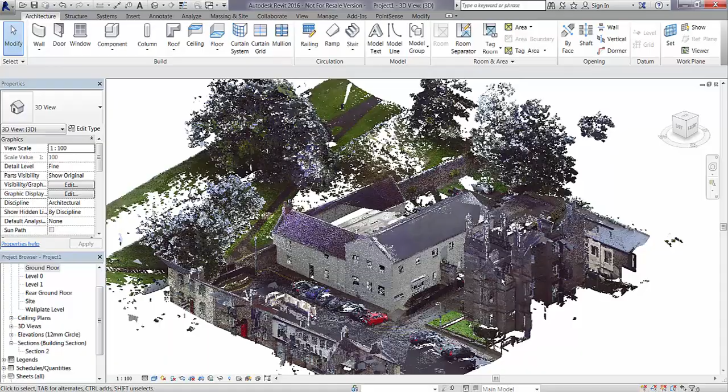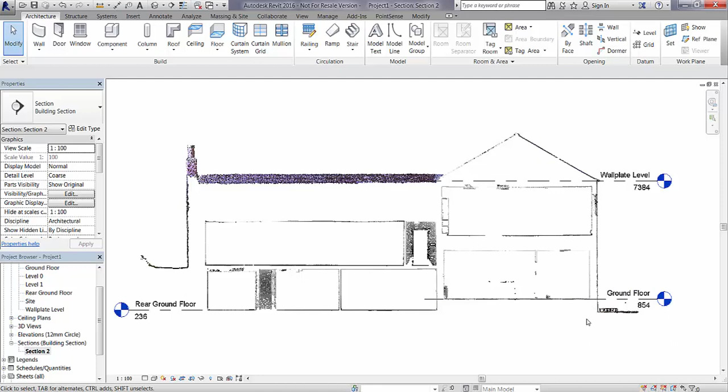So I'm just going to open up a demonstration project inside Revit now. As you can see, we have a colorized point cloud, and it is a 1960s office building of traditional construction. If we just go to a predefined section that I've already made, you can see the building's on split levels, and I've already taken the liberty of creating some actual levels for us to work from.

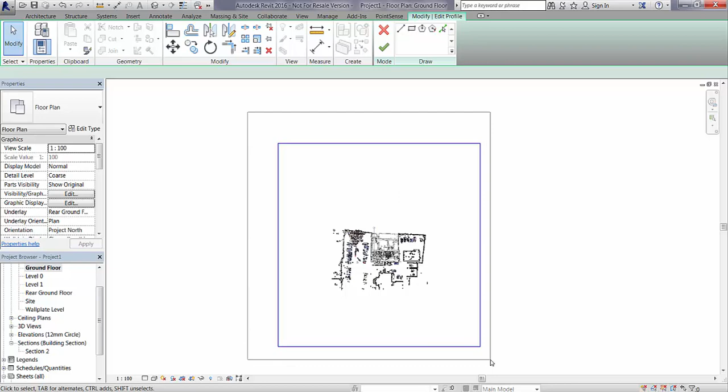If we just go to the ground floor and zoom in, one very important thing that we need to remember when using the Prepare Point Cloud function is that we need to set the clipping range of the view. We can do this by enabling the clipping box, selecting it and clicking Edit Crop. We are then going to delete that crop region area and create a new one around the outside of the building. This is very important because the Prepare Point Cloud function will search the entire extent of the clipping region.

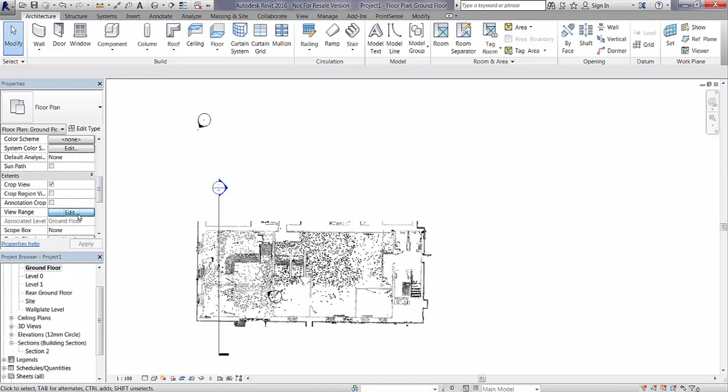So now we've changed that, the second thing we're going to do is just to hide that off, and then we're going to go to our view range and edit the view range. We're just going to lift the base of this view range up very slightly, about 600mm, just so we've got rid of some of the floor area and we've got a nice clean view that we can now run the Prepare Point Cloud tool on.

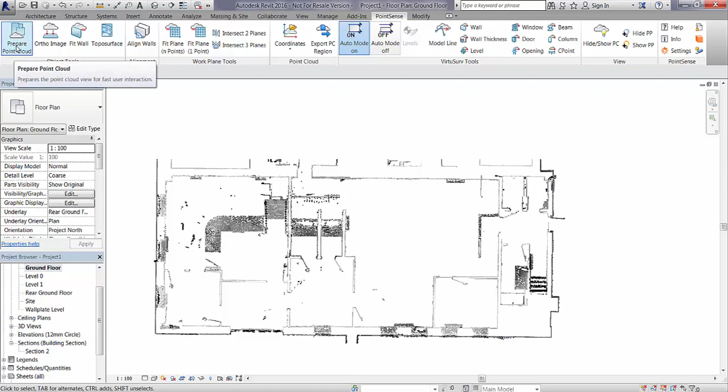So if I now go to my PointSense tab and I click on the Prepare Point Cloud tool, we are now going to be presented with a new dialog box. This dialog box is going to tell us our lower level offset, which is 600mm, and our upper level offset, as well as the clip box size. It's going to give us the option to prepare the point cloud and insert it hidden into this view, insert into this view and hide the point cloud, or to create a copy of this view and locate it there. So I'm just going to press start now.

Now you can see the speed that this is going. This is not really realistic. This will take about 4 or 5 minutes depending on the size of the point cloud you have and the crop region. This actual image that you're watching now took about 5 minutes to generate. However, obviously I've speeded this up during the video so that we could see the entire process. Essentially what's going on now is an orthographic image has been generated, which we can then insert into the project.

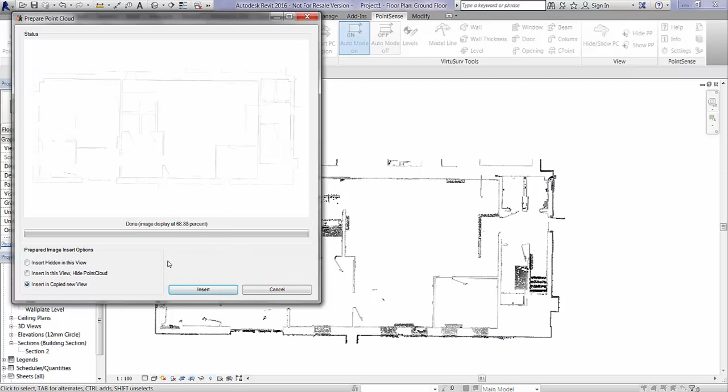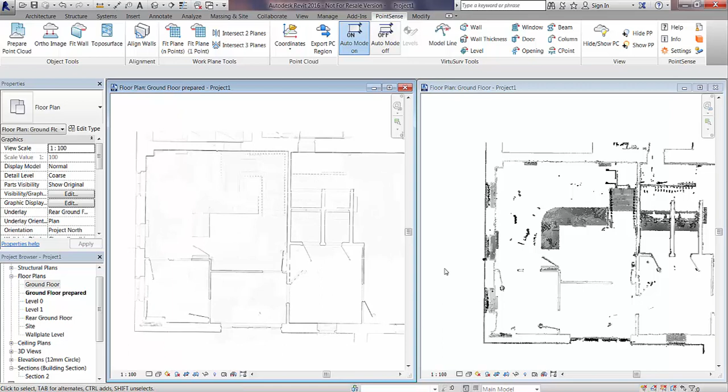So I'm just going to go now and open up my ground floor prepared view, which has been added into my project browser there, and as you can see, the Prepare Point Cloud function has basically created an X-ray type image to give us a much better definition of the main surfaces which we can see on the plan. So if we just open up the original point cloud view and tile these two together and zoom in on a couple of elements, you can see the difference that has been made and how well you can actually now see the edges of the walls, particularly around window openings.

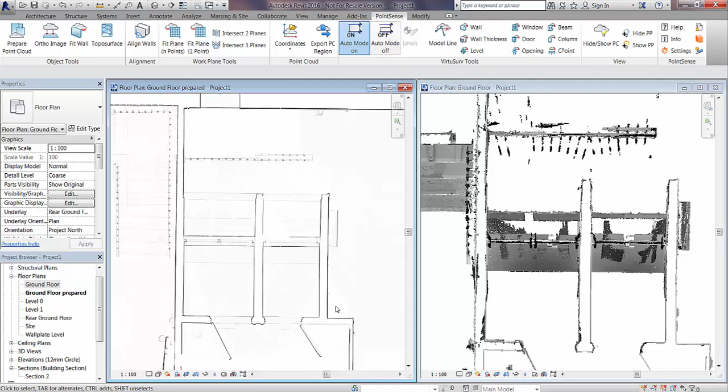We can also see the stairs a lot more clearly now. And if we just zoom in around some of these mullions and things there, we can see door openings and things are a lot clearer.

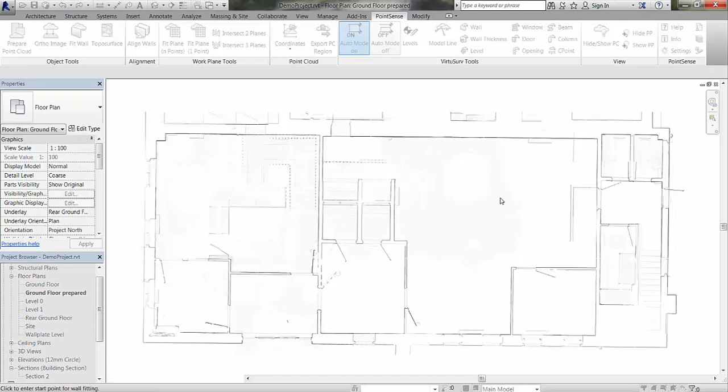So now that we've prepared our point cloud, we are going to use the Fit Wall command. To do this, I go into Object Tools and Fit Wall command. I then need to set my top constraint for my new wall, which I will use wall plate level, and I press Start Fitting. I'm then going to select a point at the start and the end of the wall of a uniform thickness, and I will be presented with the Fit Wall selection screen.

As you can see, the two red lines here have generated a measurement. The measurement of the detected thickness is 400mm, and it is giving us a selection of walls which are loaded in the project and giving us a delta measurement away from the detected thickness. So the closest fit we have is a 440mm wall. We also got this screen which we can use to determine the rounding factor we allow the software to use, and we can cancel and repeat that command.

We can insert the selected type, or we can insert the selected type with an adjustment. If we do this, this will edit the structure layer of the selected wall type with a rounding factor of 5mm and insert that wall type. However, what we are going to do is create a new wall type, and we're going to call this survey wall.

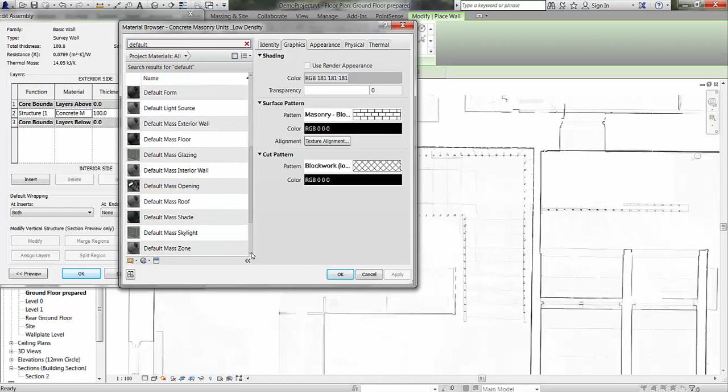And for people like surveyors or other people modelling point clouds, often you will not know the makeup of the actual wall itself. So in this instance, what we're going to do is create a survey wall type with the material set as default wall. So we set that from this list here, click OK, and we're going to leave the thickness at 100mm for now.

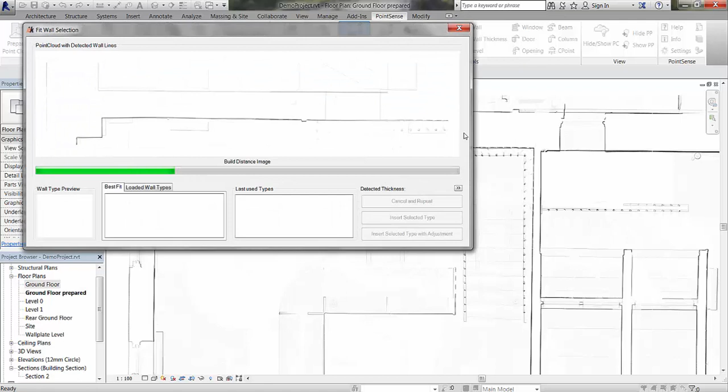Click OK. Now we're going to go back into our PointSense command and use the fit wall command again. So I'll set my level to top constraint to wall plate level again and start the wall fitting. Click the start of the wall and click the end of the wall. The algorithm runs again. Now what we're going to do this time is choose our survey wall, which is set at 100mm thick currently, and we are going to insert the selected type with an adjustment.

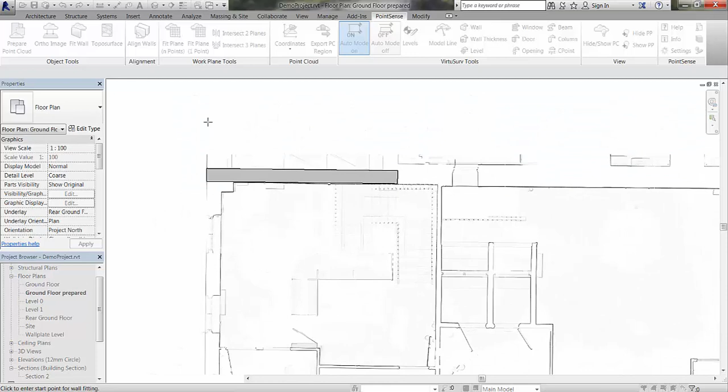What this will do is it will add the extra 300mm into the wall construction type and give us a new wall type with a suffix of the actual detected measurement. So if we select that there, you can see on the left hand side we have basic wall survey_400mm. So if I just open up the 3D view and the plan view now so you can see this, we have the wall inserted into the point cloud and the top constraint is the wall plate level.

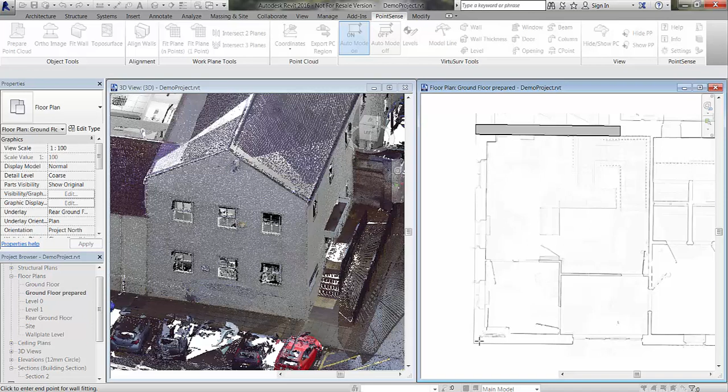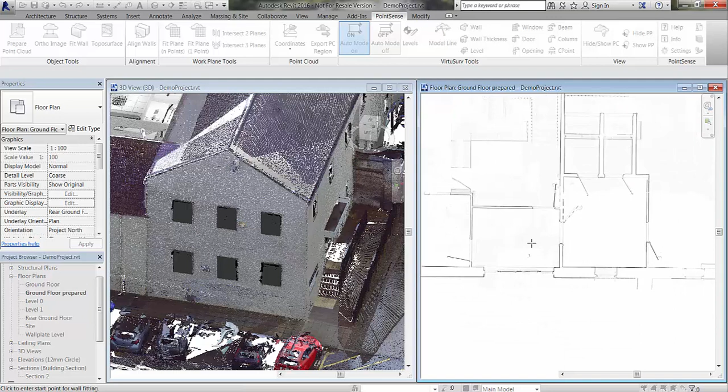Okay, so what we can do now is go back and run that start wall fitting command again, select 2 points and generate another wall thickness. Now this time we can go into our last used types column, select the survey wall again and insert that selected type with an adjustment again. Now we are using the same wall type, but we are generating a new wall type with a suffix of the detected thickness. So what we can do now is go around the project and start to insert these walls very quickly.

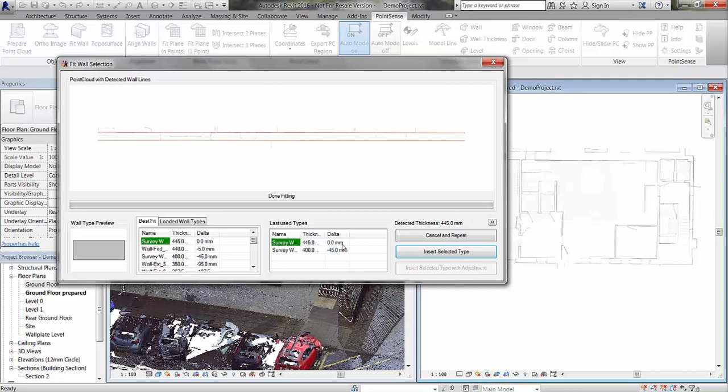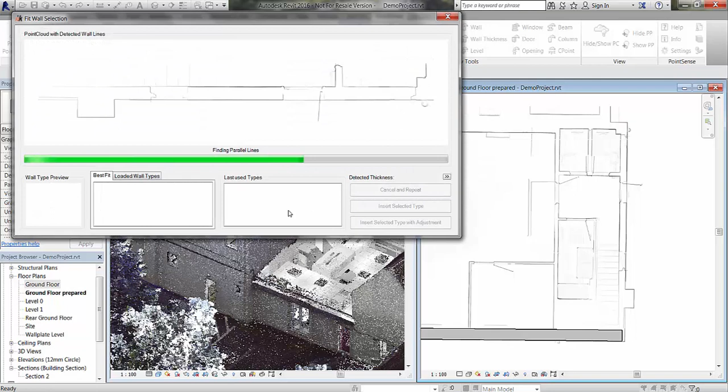For the time being, we are not going to worry too much about the actual wall joins because that will be the next step. So we're using the last used types again and inserting those selected types with an adjustment if necessary. So I'm just going to go around now and have a look at the back of this building, and we can locate another wall and fit another wall type here. So back to the fit wall command. Notice I'm just doing the external walls for now, so I'm leaving the wall plate level as the top constraint. So we can use our survey wall in the last used types and insert that with an adjustment.

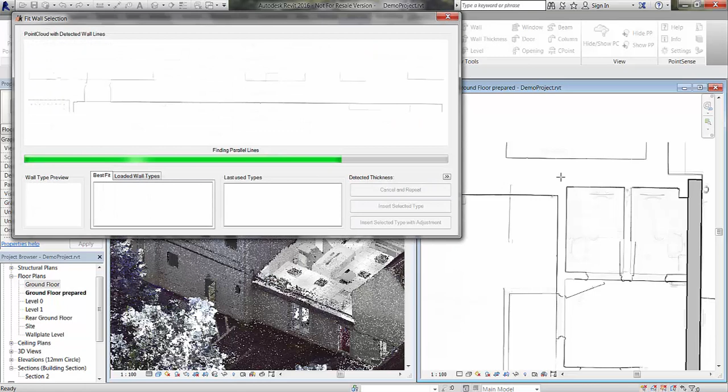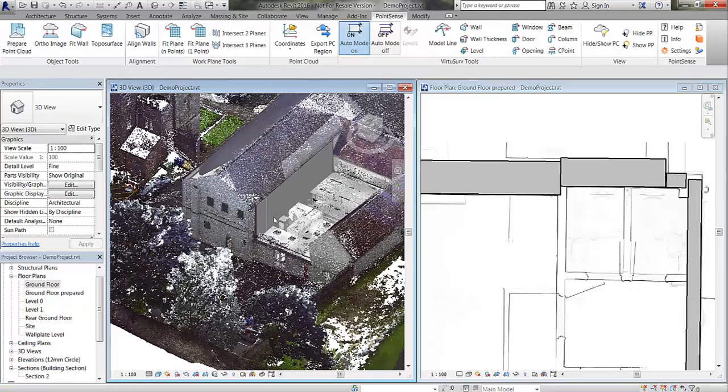So I'm just going to close off the rest of the perimeter walls now. The detected thickness in this instance is 675, however we will use our survey wall and that will automatically generate. We'll close off this corner. We can insert the selected type with adjustment there. And now we'll probably look at some of the internal walls. If we zoom back out again, close down the 3D view there and just maximise this window.

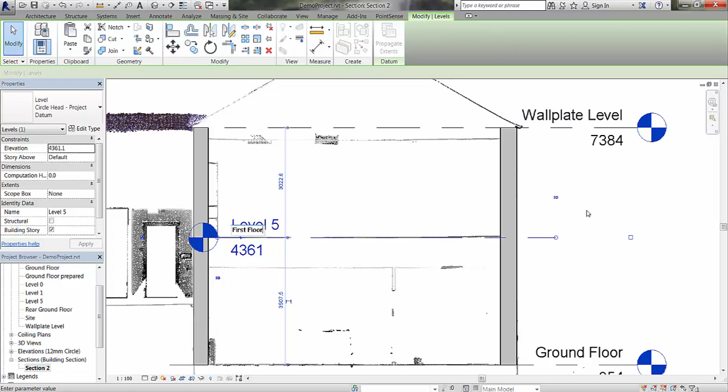So what we will have to do now is create a new level to create a new top constraint. So if we just cut a section through this building and zoom in, we're going to use the standard Revit command to create a new level, and I am going to rename that first floor, and this will be the top constraint for our new internal walls when we start fitting them.

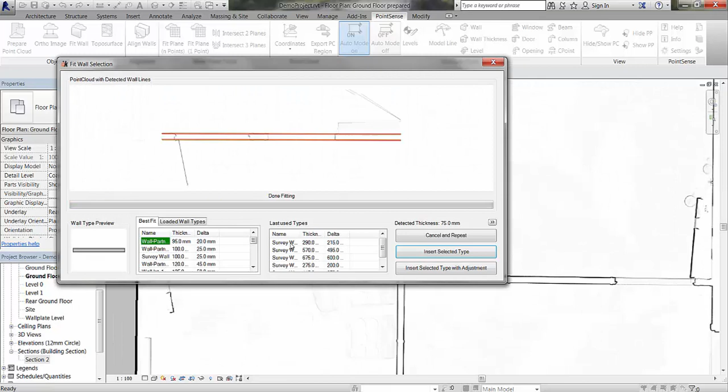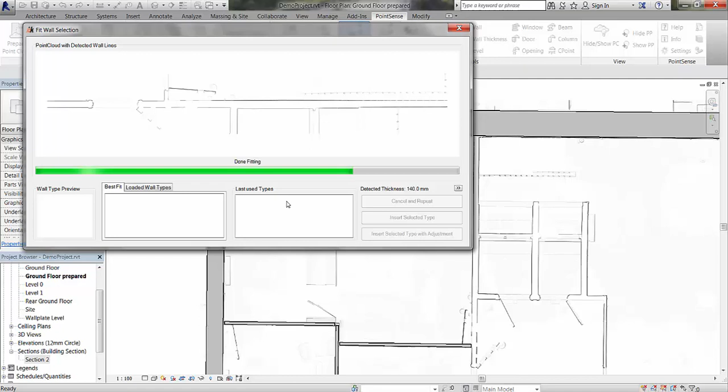So if we go back to the floor plan, go back to the PointSense tab and use the Fit Wall command. Change the top constraint to first floor, and we can start again now to fit some of these internal walls. We're going to use the survey wall type again, and we're just going to work our way around, inserting the survey wall type with an adjustment if necessary. Notice here, because some of these wall types are standard sizes, once we've generated the 75mm type, we could just insert that as standard. So go around again, insert with adjustment.

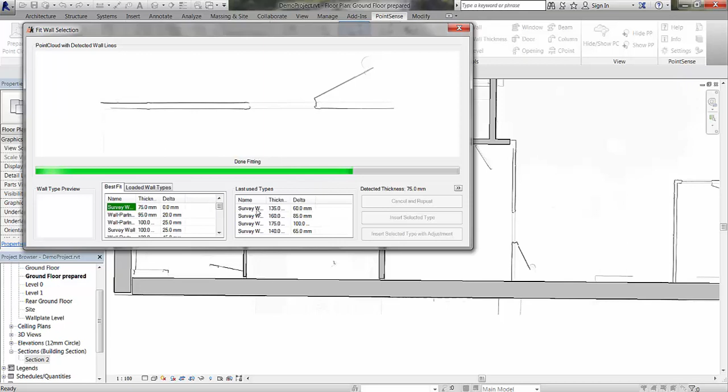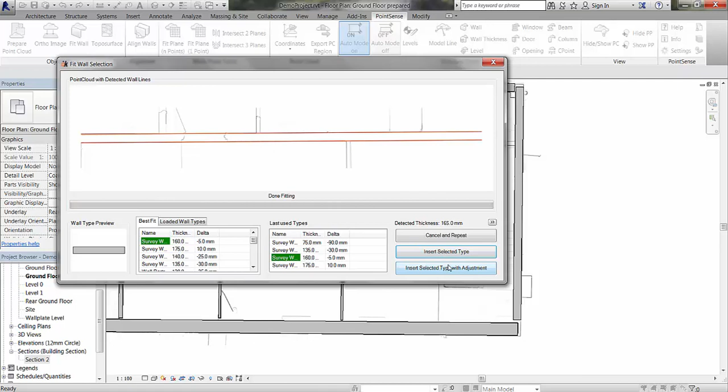So like I say, you notice we are not actually joining these walls for the time being, because that will be the next step. So we just need to focus on getting the actual walls into the building. Just close this one off here. We don't have to be too careful with our picks. We have about a 500mm radius, which can be changed in the settings if we need to. So just insert that selected type again. Insert that selected type again there, and we will just put a couple more in here to give us a good overview of the floor plan.

Okay, so the next step when modelling using the PointSense plugin is to use the Align Walls command to join these walls together. So the first thing I'm going to do, just to demonstrate this now, is to create some angled dimensions between the walls as they are.

As you can see, all of these walls have been put in and they are not straight, they are not 90-degree angles. PointSense will actually insert the walls at the angle that they are shown in the point cloud. So what I'm just doing now, I'm just dropping these angled measurements in because the Align Walls command will give us the option to actually reorientate some of these walls to a reference system of our choice, with tolerances of our choice, and these angles will actually update.

So if we just leave this as it is now, we can go back to our PointSense command tab, and we can open up our Align Walls command. So when we have the multiple wall selection ticked, we can go now and highlight multiple walls that we wish to align and join, and click on Finish. This is going to now open up our Align Walls screen.

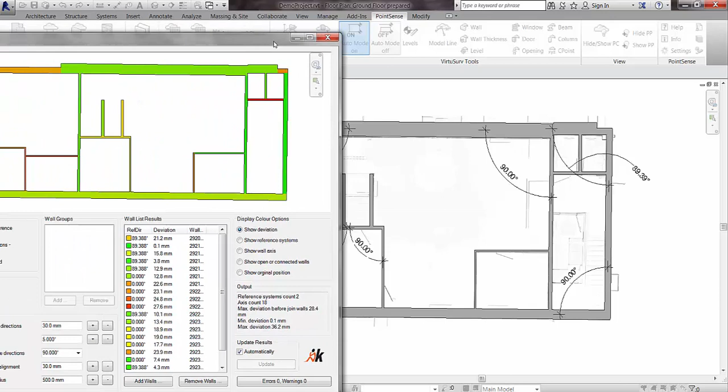So if we just move this window out of the way now, you can see these angle dimensions that we created between the walls have updated and are now either 90 degrees or a lot closer to 90 degrees. So we'll just drag this window back in and we're going to click OK to accept these changes. And now I'm just going to go to my 3D view so that we can have a quick look at this in the 3D space.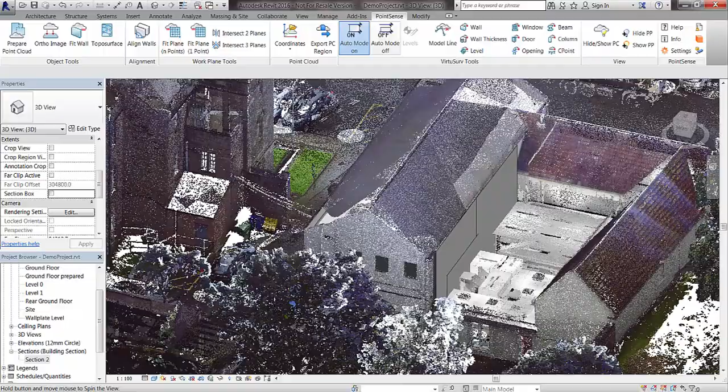Obviously the walls are now there located within the point cloud itself. We just navigate around, you can see these. We also have quite a few different walls joined up here now. And if I use the hide point cloud, show point cloud command, I can quickly just remove the point cloud from the view. We can navigate around and we can check to make sure we're happy with all of the alignments.